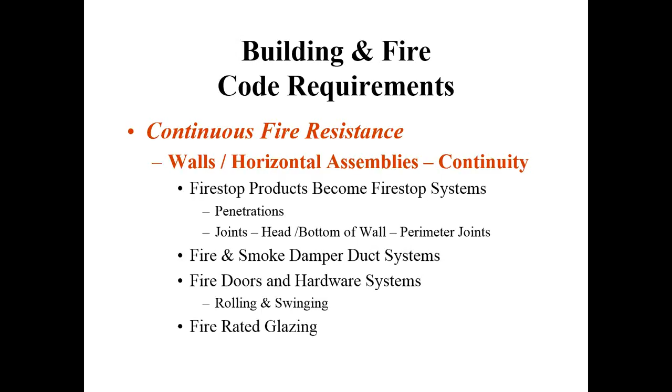Before we have fire stopping and fire resistance rated assemblies that contain dampers, ducts, etc., we have to have a fire resistance rated assembly. That fire resistance rating has to be continuous. That's what sets up the need for fire stopping, fire dampers, fire rated doors and hardware, whether they're rolling or swinging doors, and fire rated glazing.

Continuity is critical. Interestingly, if you look at the far left construction, there's a violation there if you want to be, as we look at it. Certainly the wall seems to have been constructed very much to a UL design.

Below the ceiling tile, the screw heads are all treated with gypsum compound. There's tape and drywall compound over the top of the joints, which are running vertically, occurring at a stud. Hopefully on the other side of the wall, the joints of the wall board are offset.

The violation is that in order to have continuity, that fire resistance rated wall should be going up to the roof deck above, which would be the termination point of the fire resistance rated assembly. Instead, somebody put a steel beam running across the top of the wall, which has no structural steel fireproofing on it. So therefore, the continuity of the wall actually stops at the beam rather than at the head of the wall. Secondly, there's no fire stopping at the top of the wall as well.

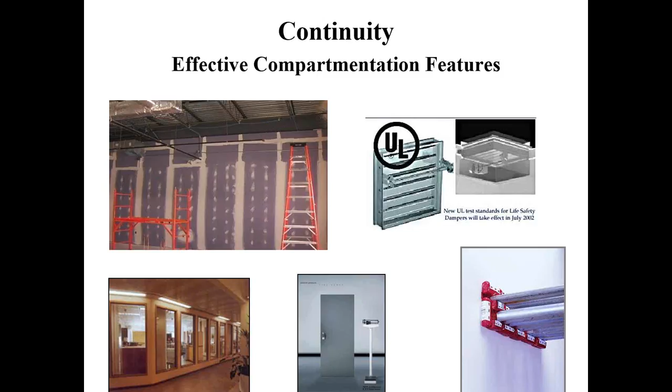But fire dampers, fire stopping, fire rated doors, and fire rated glazing all provide fire resistance. These things become systems. FCIA at the International Code Council development process in the 2006 cycle added for the 2007 supplement in Chapter 7 that the fire resistance is a system. It didn't exist in Chapter 7 at the beginning of the International Building Code before that.

So these products become systems through their testing. I've laid out the test standards that are used, and that testing sets up a suitability for use statement for the specific product in the system application.

If I were to go to the UL directory, I'll find systems that describe what to do with fire-rated glazing. And those systems deal with very complex and limited applications. See if I can get this out of here.

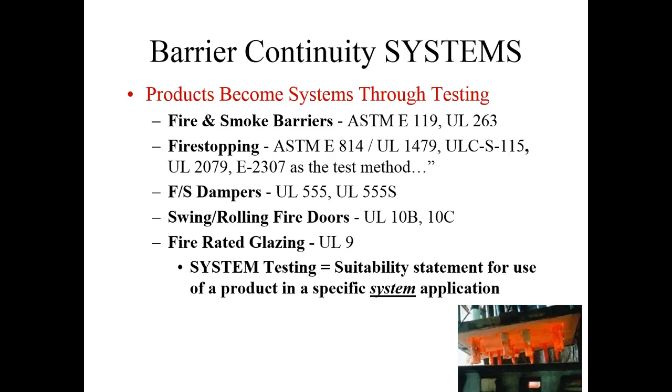In fire-rated glazing, there are impact tests where bags of steel balls would be dropped from a certain height to see if it could punch a hole through the assembly before it has a fire test, in addition to the hose stream test. In fire stopping, you don't have that. It's simply the hose stream test that is used for impact as well.

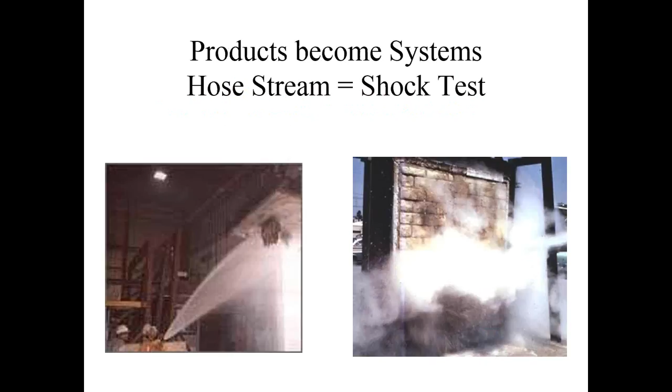So the hose stream test is common. The fire resistance directory is common for all of the different applications. And these systems have to be installed.

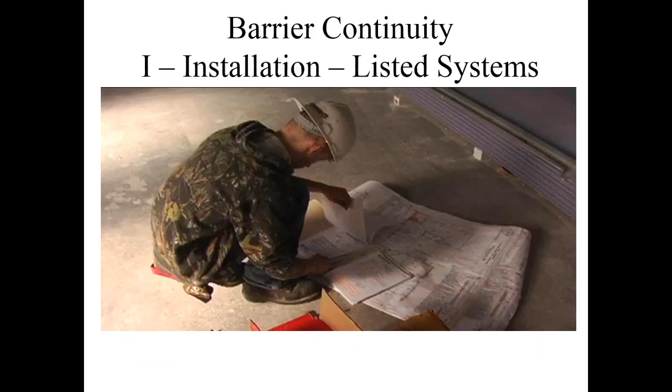When it comes to contractors, the FM 4991 program is a management system-based program. Same thing with the UL Qualified Firestop Contractor program. It has 10 different subsections that have to have policies and procedures written around it. Employee training, system selection, record keeping, communication of systems and documentation to the field and back from the field into

the project file. Documentation, how long does the company keep that documentation? Documentation that's kept are the life safety drawings, specifications, tested and listed systems, and then the manufacturer's installation instructions. All of those pieces are kept in files. For how long? Under the UL and FM programs, 7 years they have to be kept.

So there's got to be a management system around the company's operations that explains all these things. Currently, the Firestop industry is the only industry, other than structural steel fireproofing, that have embraced the management system-based program. Most other programs are individual certifications where an individual takes an exam of some kind after a little bit of training, 10 hours, 16 hours, 12 hours, whatever it is, and then they're declared, quote, certified.

This is just about the company and the individual, the FM and UL programs. And the idea is understanding the systems, their communications, and how they get installed.

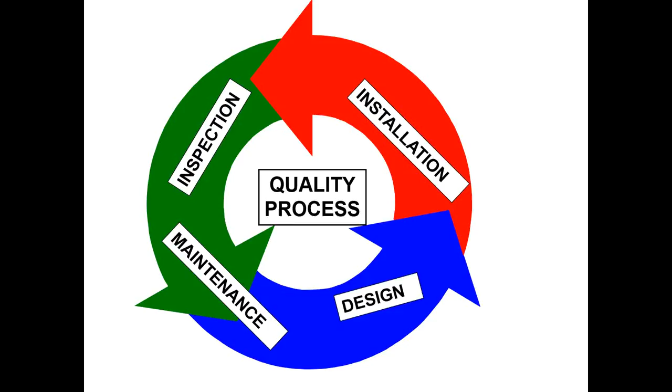Whether it's the design, tested system, the installation, the qualified contractor, and the other two pieces, which we're going to talk about next, the inspection and maintenance, all of these things need to go around in a circle continuously for that building to be safe when fire comes and these fire resistance rated systems are called upon.

Installation and inspection go around in a circle. There's really three types of inspection that can take place. Under the FM and UL qualified contractor programs,

there's contractor self-inspection that the management system actually works. Contractors have their crews double back and take a look either hourly, twice a day, once a week, whatever the company thinks that works for it to maintain its management system quality, whatever that frequency is, that's what the company does.

But all of them have to verify their management system validity through some kind of inspection of their own work by their own people. This is different from a special inspection or a third-party independent inspection.

Manufacturers in the Firestop industry and most of the fire resistance industry don't really inspect. Why? It's different than the roofing industry, where they do have a 10-year labor and material guarantee or warranty that's given to the building owner verifying that the product will be installed to the specifications and work. In those instances, the manufacturers have a pretty big liability.

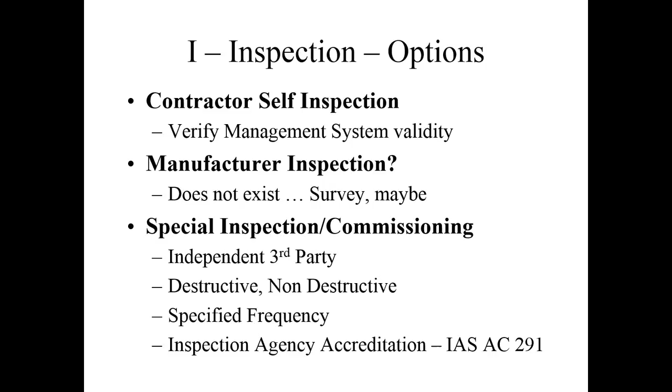There's already a program that exists, International Accreditation Services. I sit on the board of directors of that organization. It has a program named AC291. That AC291 program is a management system-based program like the FM 4991 and the UL Qualified Contractor Program, but it's focused at special inspection. So there are 3 different types of inspection.

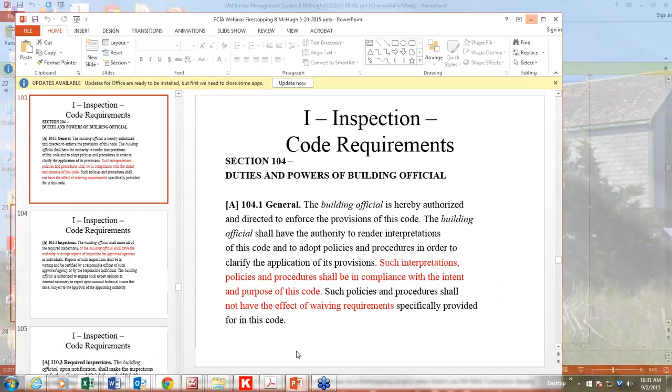All of them exist to try to build safety and fire resistance. But maintenance and management is critical. Let's go back to inspection just for a second. I'm going to spend a little bit more time there because I think it's important that we do this for a couple of reasons. First one is, in the International Building Code for new construction, special inspection is now part of fire stopping.

The FCIA, at its 2000 meeting, had Mike Pfeiffer, Vice President of Codes for the International Code Council, come and speak to us. A question was asked by Roger McKenzie and Don Sabrsula, a couple of contractors, one from Atlanta and one from Houston, and they said, hey man, how come we don't have inspection for fire stops like we have inspection for fireproofing, structural steel fireproofing?

Special inspection for fireproofing has been in the codes for a long, long time, decades I want to say. And Mike Pfeiffer shot back very quickly, well, do you have a standard? The answer was no.

So Mike then said, go make a standard at ASTM, which we did after we formed a standards committee and worked together with our manufacturer partners, some who are members of the International Firestop Council, the Manufacturers Association. We worked together with them to develop a standard for inspection.

We then went to the code. FCIA paid Bill Koffel, our code consultant, and I, of course I work for the FCIA, to go at the code hearings and put it in as a requirement. It took us 3 code cycles, so 10 years to get this done.

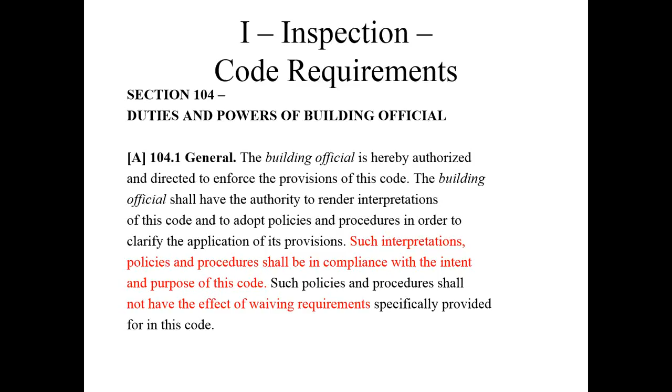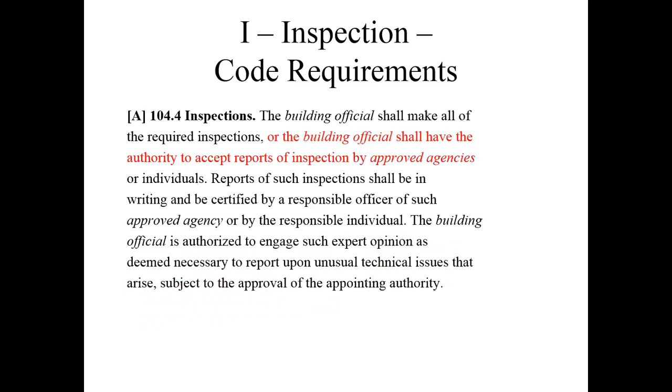The building code official can put together policies and procedures in compliance with the intent of the code and not waive stuff. Inspections can be done by the building official, or they can accept reports of approved agencies. The approved agencies have a definition as well.

Fire stopping is one of those things that has to be inspected before it's concealed. In 110.3.6 of the International Building Code, it says, protection of joints and penetrations shall not be concealed until inspected and approved. What we found as an industry is that the building official fire marshals don't have the staff to inspect all the different times that it might be concealed.

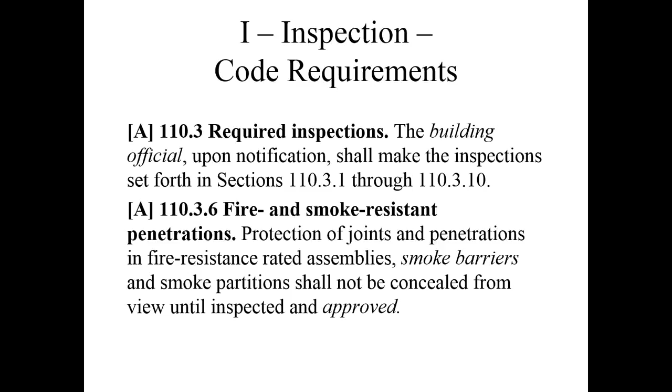If you can think of a high-rise building, there are many different phases. That means that the building inspector from the jurisdiction would have to come to the building site and approve every time they close up a wall. Realistically, the building official doesn't have the responsibility for quality control for the building, and this is a bit much for them to do.

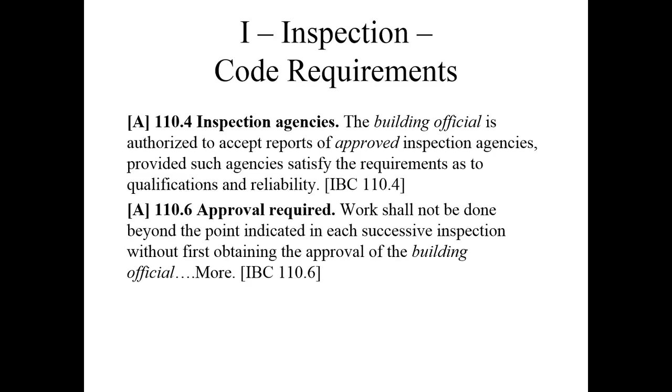The building official can also accept reports of inspection agencies, provided that it satisfies requirements. The agency is a defined term in the code. Approved agency is an established and recognized agency. Agency can be a corporation, like I said, 4 different types: sole proprietor, sub-S, C corporation, LLC corporation, regularly engaged in furnishing tests, inspections, and conducting tests.

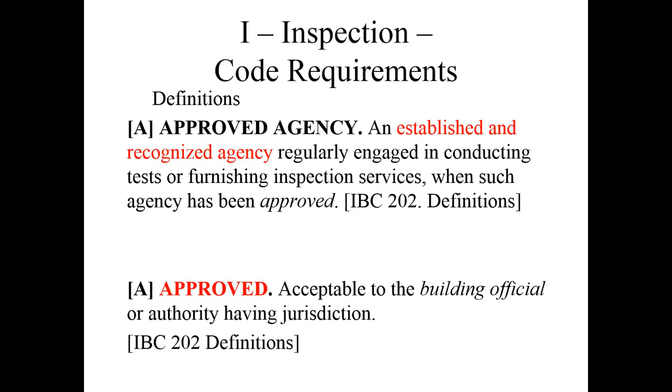The approved is also a defined term. Approved is acceptable to the building official. There's also a definition for the special inspector.

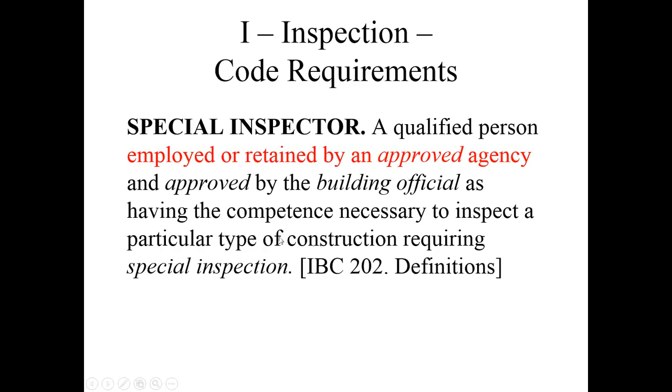That's the individual, qualified person employed or retained by—so it could be an independent contractor working for an agency or an employee—that's also approved by the building official, having competency necessary to inspect a particular type of construction requiring special inspection. This is pretty clear, it says competency, particular type of construction. So if they're inspecting fire stopping, they're going to be competent in fire stop.

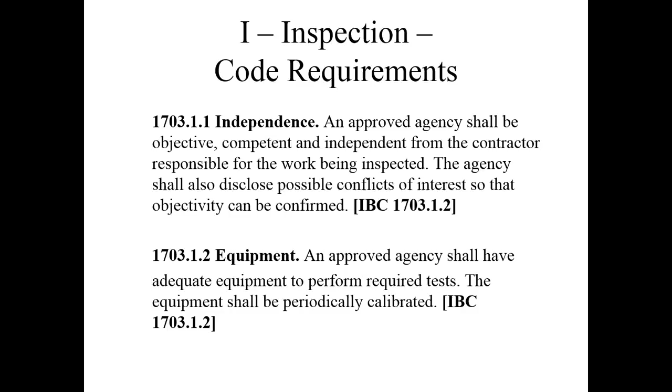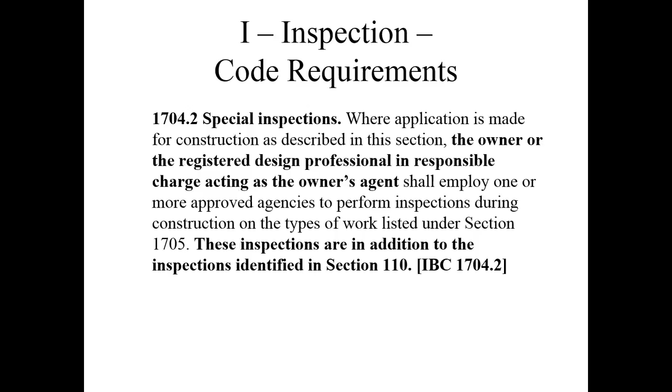In Special Inspections, Chapter 17, it also goes on to say that the approved agency has to provide information. The approved agency has to be independent, objective, competent, independent from the contractor installing the work. And the personnel shall be experienced in conducting, supervising, evaluating tests. Alternatively, the owner can have the registered design professional as their special inspector as well.

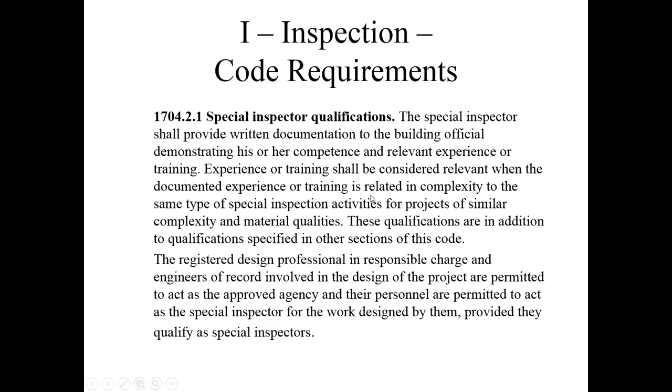And then it goes on to talk about special inspector qualifications, and it's two paragraphs that the special inspector has to provide. Experience or training—here it goes and says complexity, same type of special inspection. So a welding certification doesn't help you in accepting whether or not the inspector can inspect fire stops.

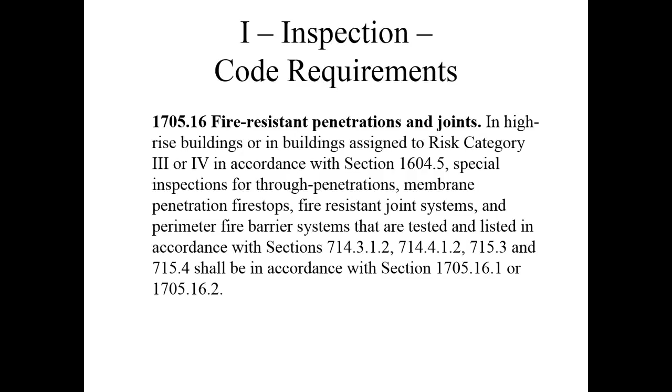And then here's what the standards say about penetrations and joints. High-rise buildings, that's a defined term in the building code. That means 75 feet and higher above the lowest fire department access, and the 75 feet is to the highest occupied floor—not 75 feet to the roof. Contrast that to the NFPA, which says 75-foot high building. The National Building Code of Canada, I believe, does the same as that as well.

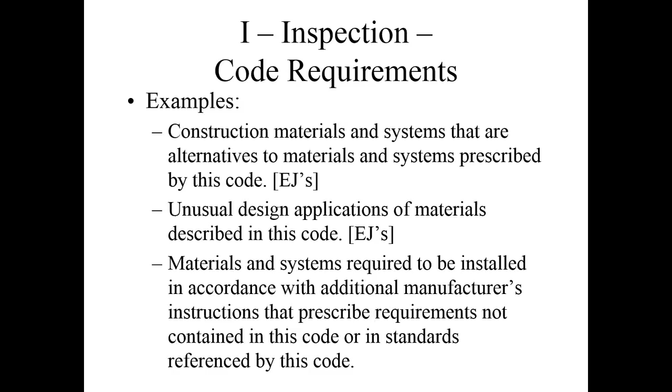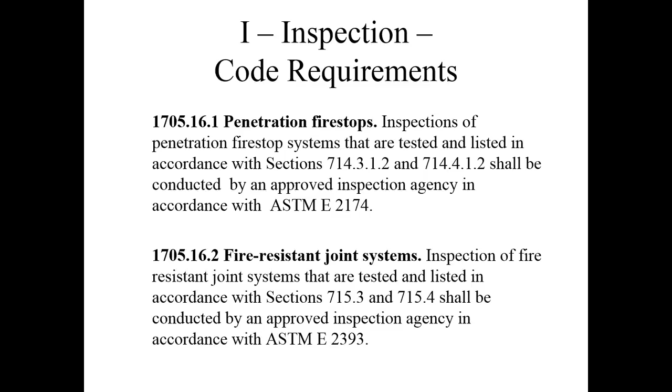So special inspection can also be prescribed for unusual design applications, engineering judgments, that kind of thing. High-rise building we talked about. And then penetration fire stops are inspected to ASTM E2174 and 2393. Those standards have also got independence in them as well.

Critical thing to remember, though, is that the ASTM inspection standards say that the notification of variances to the contractor is one day after they're discovered. The International Building Code says that the contractor must be notified immediately after the discovery takes place. That's a huge difference between the two. Now, it doesn't mean it can't take place, because with cell phones and text messages, if it's set up right, the contractor can be notified immediately—especially in the situation of 2% destructive testing or 10% variance.

Let's take a look a little bit more about the standards. The inspection standard, ASTM E2174, says that you need two years experience and to be accredited to the AHJ. If you remember, the code says that the inspector needs to have experience in the same type of inspection and the type and complexity of the materials being inspected. So the code says the inspector should be experienced in fire stopping. The standard, ASTM 2174-2393, currently doesn't say you have to have any experience in fire stopping—it just says experience in construction or field inspection and accredited by the AHJ.

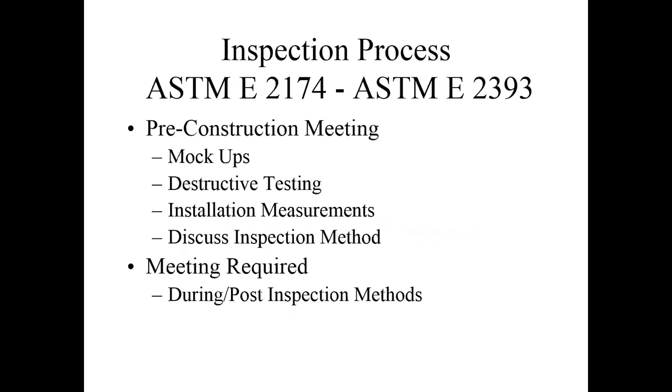So there's a pre-construction meeting in the 2174. There's mock-ups that are put together, destructive testing is done, and the inspection method is discussed. The inspection method for inspection of fire stopping is 10% of each type of fire stop, no less than one, or 5% of the total lineal feet of fire resistance rated joint system. This is the over-the-shoulder inspection.

So there's two methods allowed under ASTM E2174-2393: either over-the-shoulder inspection as the contractor is installing, or destructive testing. The destructive testing is minimum 2%, no less than 1 of each type of firestop per 10,000 square feet of floor area, and minimum 1 for every 500 lineal feet of joint area as well.

This standard, E2174-2393, is referenced in the appendix of the National Building Code of Canada, and also in the appendix of NFPA 1 and NFPA 101. The FCIA and the International Firestop Council worked together to put that into the NFPA code. The International Firestop Council and the Manufacturers Association supported the FCIA during the International Building Code development process to have this put into the code.

Again, when there's variances, it's one-day notice to the contractor under the standard, and under the code, immediate attention. In the code world, once you look at the building code, the building code language always wins over the standard referenced in it if it's more restrictive.

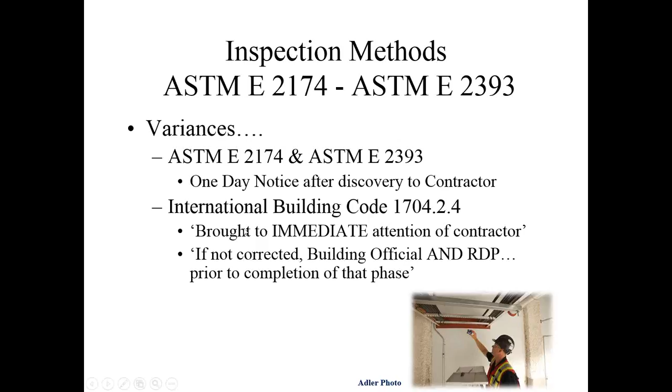Therefore, on projects where the International Building Code and E2174-2393 are mandated, this language is required. If there's variances, the inspection stops. The inspector notifies the contractor through the proper channels, the contractor corrects their work, and then back they go.

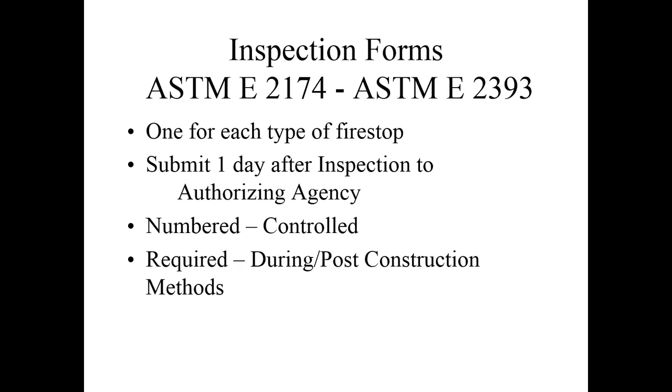There's an inspection report that has forms. There's minimum requirements in the inspection standards about those forms, and they're submitted pretty quickly as well. The code then talks about the inspection report, and here's what it says: the immediate attention of the contractor for correction. That's huge. It's sitting right in the building code.

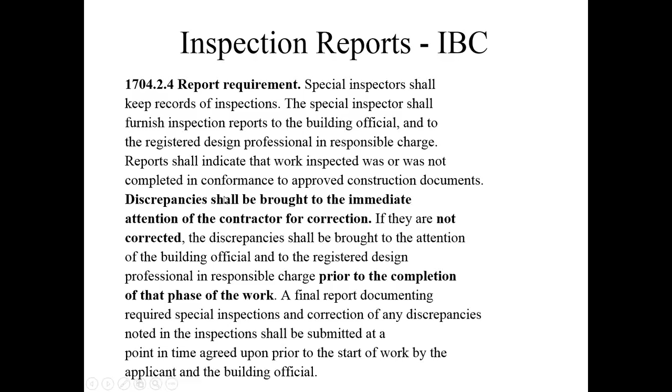So it's important to have those things. Got a question that just came up on inspection. It says: some of the projects we are working on, the third-party inspector is requiring that the firestop systems on the project be included on the drawings. Is this part of the inspection code or the inspector's prerogative?

Great question. The International Building Code doesn't necessarily say what systems need to be referenced on the drawings. What it says is that the fire-rated barriers have to be located and marked on the drawings.

Typically what happens with the architects is they'll put a representative sample of what systems might be on the project itself, but not necessarily tying it to every single system, because we know that the electrician has not decided what size and type of conduit to use or cabling to use. And in many cases, the mechanical plumbing contractor may not have chosen the type of penetrating items that are going to be used on that project. So therefore, it can't be 100% of the tested listed systems on the drawings.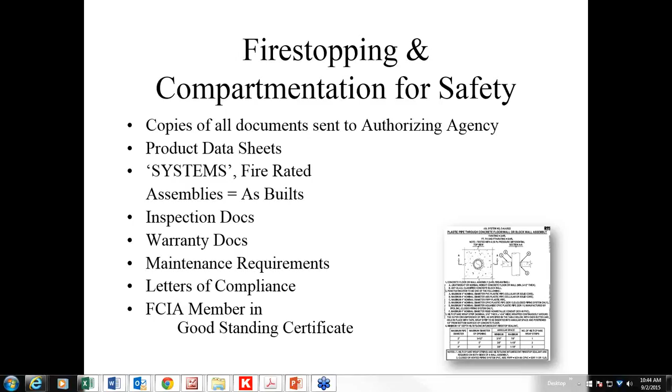Moving back to the slides, the FCIA believes in inspection. We believe in quality contractors. We believe that you need both the installation and inspection properly done to have the right value delivered to the customer, the building owner and manager that uses the building after it's all said and done.

We believe the individuals should be educated and trained. We really respect the manufacturers for all the work that they have done over many years to educate building code officials, contractor personnel, and inspector personnel. The FCIA has done the same thing as well, and we've worked together as an industry, sometimes separately, but all after the same result: the right stuff installed the right way, inspected appropriately, maintained for the life cycle, so at the end of the day, when a fire hits it, it works.

Both associations, both organizations are after the same thing. Under the specification side of things, we talked a little bit about it. Now I'm going to cover this just quickly for a couple of minutes, because while most of our industry focuses on the building code and the fire code, specifications are huge too, because it sets up the scope of work.

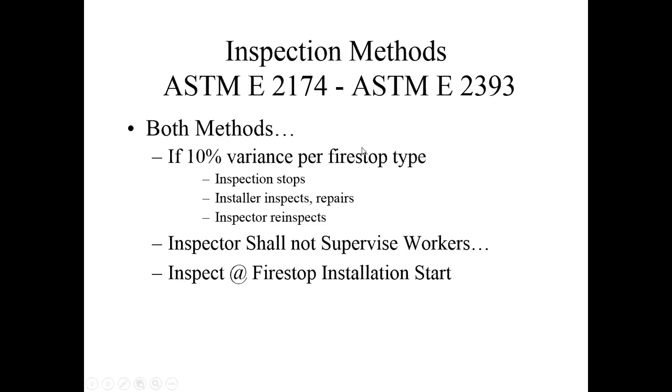Before I get there, I've had a question come in about destructive testing. Let me back up a second, back to the type of inspections. So there's two types of inspections under the ASTM E2174-2393.

The first one is, as the contractor is installing the firestops, the special inspector uses a measuring device equal to the measuring device of the contractor, so both of them are using tape measures. Under the quality management system approach from UL and FM, these measuring devices have to be checked to make sure that they're legible, that the markings are appropriate, and that they're not bent to the point that the measurement is inaccurate. If you look at this tape measure, there's a little bit of a bend in it.

Is that going to affect things? I'm not too sure, we'd have to ask UL that. At one point, UL was going to put into their qualified contractor program that the measuring tape had to be calibrated. A calibrated measuring tape is $150.

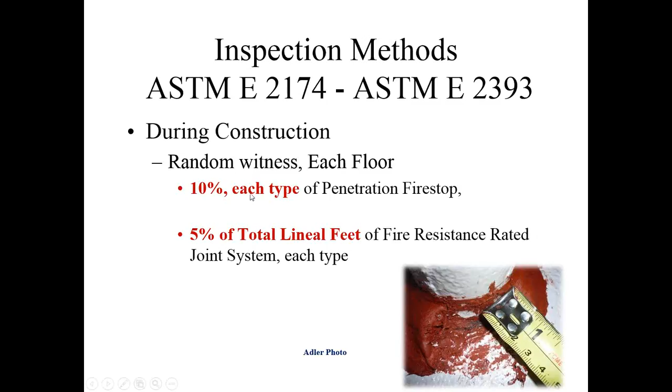We then asked UL, how do you measure your annular spaces in the testing laboratory? They said, we use measuring tapes. We asked, are they calibrated? They said no. So in order to pass through exactly as the lab tests it, we're not using calibrated measuring tapes. Random witness is one thing, and destructive testing is also done.

The destructive test would be, we take the tested and listed system from the UL directory for this particular opening. It looks like a cable tray going through a fire resistance rated wall with an annular space of X and a number of cables of X, and check all the parameters. Is the annular space matching up? Do the penetrating items match up? Does the Firestop system product that was installed match the system shown in the directory?

If it's supposed to have a half inch of latex-based intumescent Firestop sealant, if we're inspecting right away as it's being installed, is it a half inch deep? If the product has been there for a month and a half and experienced some shrinkage, as all latex products and Firestop products that cure, that aren't two-part catalyst cured, have they shrunk and how much? Does that shrinkage match up to the shrinkage reported by the manufacturer of the Firestop product, to determine whether or not we got the appropriate thickness?

So destructive testing is cut open the seal, check the components of the Firestop, and see that they match up to the tested and listed system. Is the direction of the penetrating item matching? Does the wall or floor match up? All of the different things.

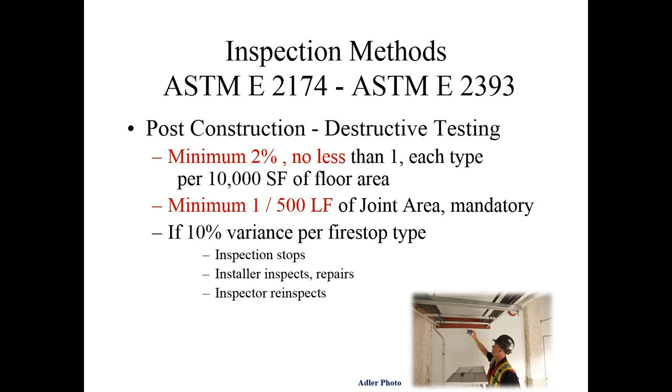What about specifications? In part one, you're going to want the products listed, or the references: ASTM E2174-2393, ASTM E814, UL 1479. That's all in part one.

In part two, you're going to describe some of the testing that needs to take place that qualifies those products for use. Under part three, quality assurance, that's where you're going to have the independent inspection.

It needs to reference back to Division 1 so that it's hired by the building owner and manager and not by the general contractor. Why? Because if the general contractor is hiring, they're responsible for the schedule, and it puts a conflict between the inspection and the schedule. The schedule has to roll. The inspection may slow it down.

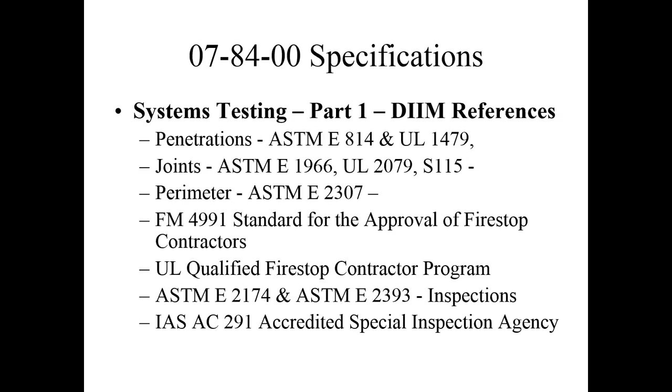And then the references, you can take a look at these at your leisure along the way as well. One question that constantly comes up is, our facility has standardized on, pick a manufacturer, STI, Hilti, 3M, Rector Seal, any of them. They're great manufacturers, we support them all, and they're good friends. But can we have a single product in that application?

It gets difficult when the engineering judgments start showing up and whether they're accepted or not. The rule of thumb for engineering judgments is that if there's a manufacturer that has a tested and listed system and it's not the manufacturer of choice at that facility, we're supposed to use the manufacturer that has the tested system. That means we're switching manufacturer.

Therefore, as a specifier, you can use a single source product to the greatest extent possible. That greatest extent possible opens up the possibility that we can switch a manufacturer. In other words, we're using as much as we can to the single source, but if we have to use another manufacturer because they have a system and one of the other guys doesn't, then that sets up the ability to do that. Where does that come from?

The International Firestop Council, which is the Manufacturers Association, has a protocol for engineering judgments. And that protocol is pretty specific. It talks about the manufacturer producing an engineering judgment and others accepting it.

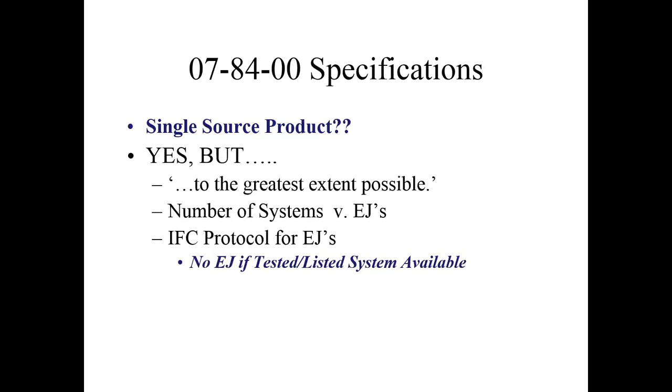Under the systems, FT, H, L, and W ratings are all important. L ratings are particularly important in smoke barriers, which we find in hospital organizations, where we find barrier management programs. Our industry, the Firestop industry, has declared that smoke resistance is gained through L-rated Firestop systems.

So the question that frequently comes up: okay, we've got a smoke partition, which is not a fire-rated assembly, but it wants smoke resistance. What do I do?

Well, think about it. The wall is made out of 5/8-inch gypsum wallboard. That 5/8-inch wallboard, regardless of whose it is, is type X, whether it's fire-rated or not. It's installed on metal studs or wood studs, spaced appropriately to hold the wall up. That spacing likely is the same as you'd have with that fire-rated assembly. It has screws that hold the wallboard to the studs, and it's continuous to the next assembly. The only thing that changes is it's not been declared a rated assembly, but it looks just like, tastes just like a fire resistance rated wallboard assembly.

So therefore, we believe that installing a Firestop product that is L-rated into that assembly gives the closest approximation for smoke resistance that we have. It gives a quantified smoke resistance, which is required for smoke barriers, not necessarily required for smoke partitions, but it is the suitability for use statement of Firestop products as smoke resistant assemblies.

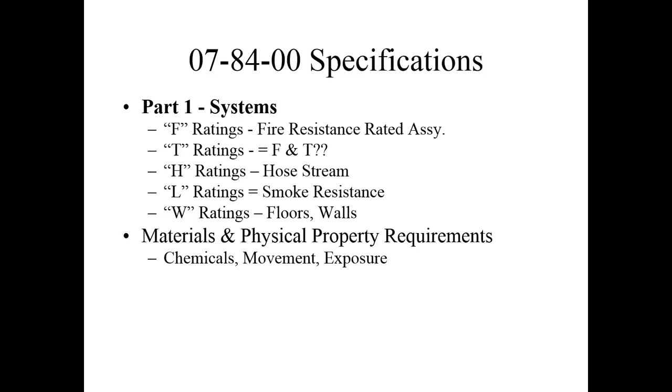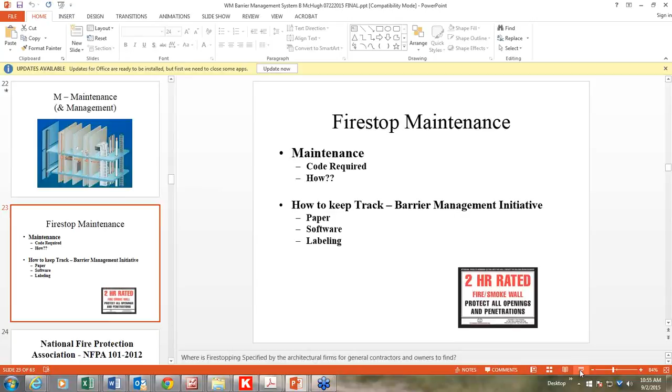As far as maintenance and management goes, let's go back to the other presentation and talk about barrier management. Maintenance is critical, and I'm not sure maintenance is the right word. I think management, barrier management, is a better word.

Why? When we talked with the Joint Commission and the American Society for Healthcare Engineers about this barrier management symposium, at first the discussion was about these holes in the walls and these darn doors. The fire doors don't close and latch. They're propped open, and they're not paid attention to. And what about those holes in the walls? Well, yeah, it's about that.

But what about the angles on the fire dampers? Were they put in right? What about testing them as required by the fire codes and NFPA 80, which is testing upon commissioning, testing 1 year after it's been commissioned, and then every 4 years in office buildings and every 6 years in healthcare facilities? What about that? Is that done?

What about the fire-rated glazing? Has the wall been compromised between the frame and the wall that would cause it to fail the hose stream test? And what about the rolling doors and the fire stops and the wall itself? How has the wall been repaired to make sure that the fire resistance is held? Can we just put a bunch of drywall mud over that hole and still have a fire resistance rated assembly? Can we just put a bunch of grout or mortar around it and still have a fire rated assembly?

So very quickly during the discussions, we decided - the Joint Commission decided, American Society for Healthcare Engineers, FCIA, and UL - we should be talking about the whole barrier so that it's bought as a system. Because it is a system, each component needs to work right for it to protect people at the end of the day. If we as the fire stop industry do a good job, but the fire damper doesn't work, we've still got a big hole in the wall.

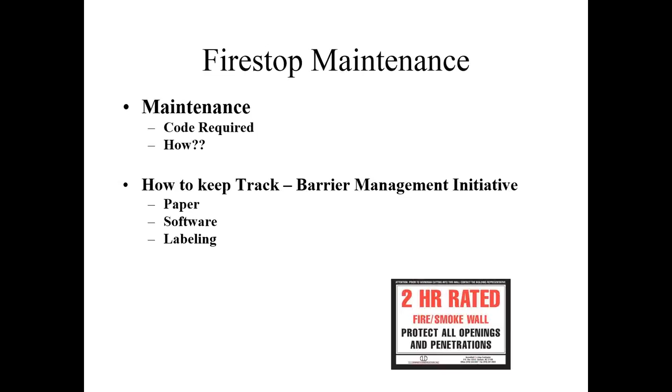So we talk about maintenance and management. That's what this barrier management initiative is. How do we track it through the life cycle of the building to make sure that the building has fire resistance rated assemblies throughout its life cycle?

First thing is that the building and fire codes require it. NFPA 101, the Joint Commission enforces NFPA 101-2000. But if you look at the language in the 2000 version of the code, as well as the 2012 language of the code, they're basically the same. NFPA 101 is what healthcare facilities operate under, and a lot of other accredited facilities, day surgery centers, on and on.

It says wherever and whenever a device, system, or fire-resistant construction is required for compliance, it has to be continuously maintained in accordance with NFPA requirements. That's the ASTM E814 tested system for fire stops, UL 555 for the damper, on and on.

So continuous maintenance. Now, in a court of law, the question would come up: well, what's continuous maintenance? Certainly no building owner is going to check above ceiling tiles to make sure there's continuity of fire resistance every day. That's unreasonable. But what's a reasonable time frame? We'll talk about that in a little bit, because I think other codes have already laid that out.

Also under NFPA 101, it talks about no life safety feature shall be removed or replaced if it's obvious to the public and not required by code. It still has to be maintained, so the building owner or manager has to remove stuff once it's been declared not required by code. So if the compartment got bigger and that fire rated barrier is now declared not rated, if the building owner or manager wants to not maintain it, they have to remove the fire resistance rated stuff.

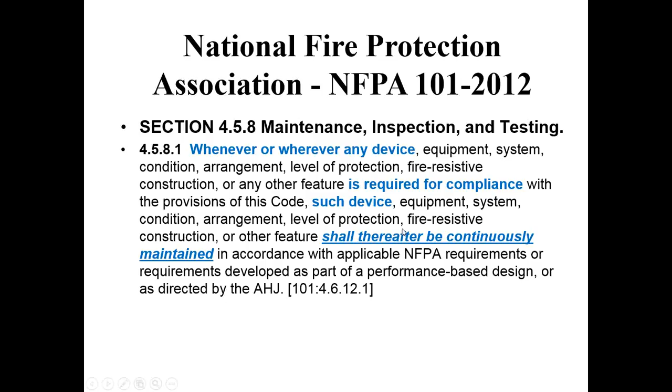So, how do you maintain the fire ratings? Visually, by the owner, and then continuously with some kind of procedure.

I've had a question come up about a product called smoke and sound for smoke walls. That's pretty much an acoustical sealant. Well, thanks for the question, but I don't know what that smoke and sound stuff is. The question would be, has it been tested, and does it have an L rating? The L rating is the suitability for use statement for Firestop products and specific applications. If it has no L rating, then it's not a smoke system.

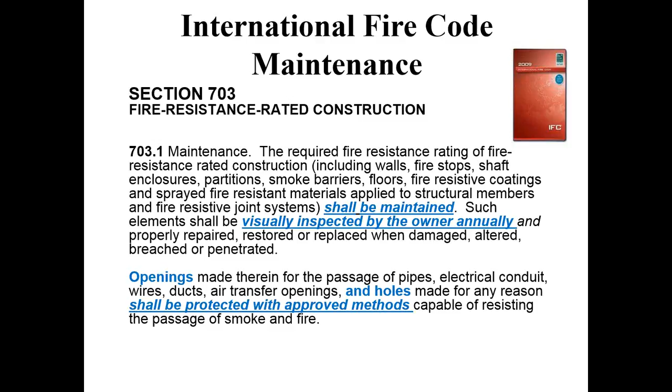So those are the questions to ask. Thank you for asking that.

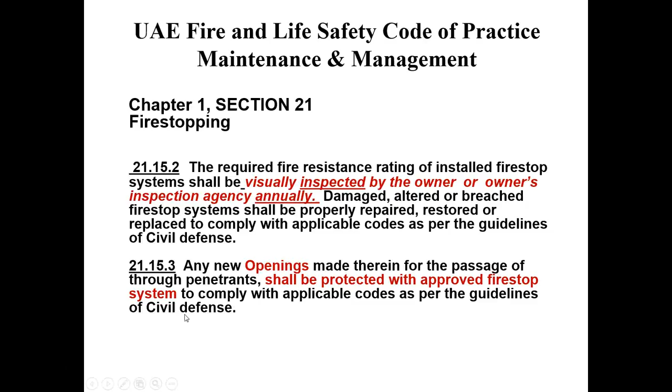Going to the Middle East, the UAE Fire and Life Safety Code of Practice, which several members on the phone worked on, has similar language to the International Fire Code: visual inspection annually, and then protect with approved Firestop systems to comply with applicable codes per the guidelines of the civil defense. In the UAE, the civil defense is the same as the building official, fire official type person.

In the National Fire Code of Canada, it talks about damage to fire separations, where they're damaged so as to affect the integrity. They shall be repaired so that the integrity of the fire separation is maintained. So again, it gets back to continuous and maintained.

How frequently does that maintenance have to take place by the building owner or manager, and then what do they do? The FCIA Manual of Practice has a complete appendix on maintenance and also recommends barrier management.

So now you're the building owner and manager, and you got to say, okay, this is a real pain. I got the plumber, the mechanical, the electrical, the drywall person. I got people punching holes through these fire-rated barriers like there's no tomorrow. How do I deal with all these problems coming at me at once?

Well, the old management adage is, don't fight the alligators. Drain the swamp of the water and it'll kill the alligators. The barrier management program, regardless of which one you use, is there for that reason: to fight the root cause of the problem, which is how do we manage the barrier, and then work backwards to kill the alligators.

The barrier management begins when new construction ends. In new buildings, the specifications are very clear. The specifiers we've spoken to since 2000 and before have had great discussions about specifications and what to do and how to line them up. Master Format has evolved over the last several years such that the 078400 section for fire stopping already exists, and it does a great job.

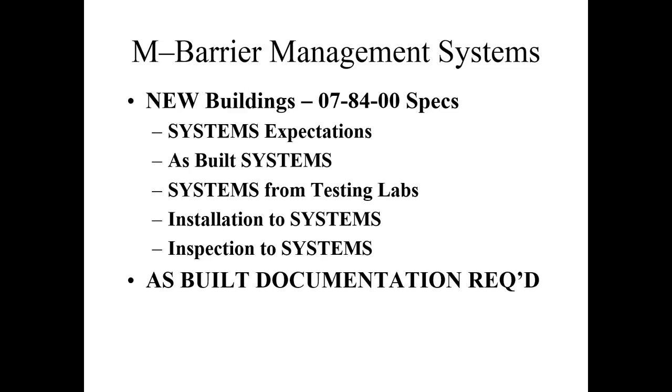The common element, though, regardless of whether there's dampers, doors, etc., is that these are all systems with systems expectations, tested test standards for those systems, and documentation built around those systems.

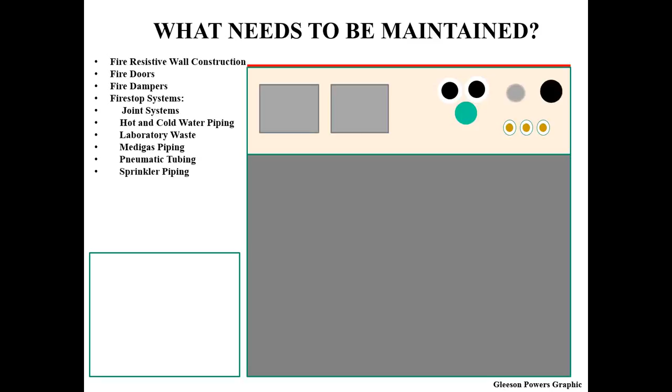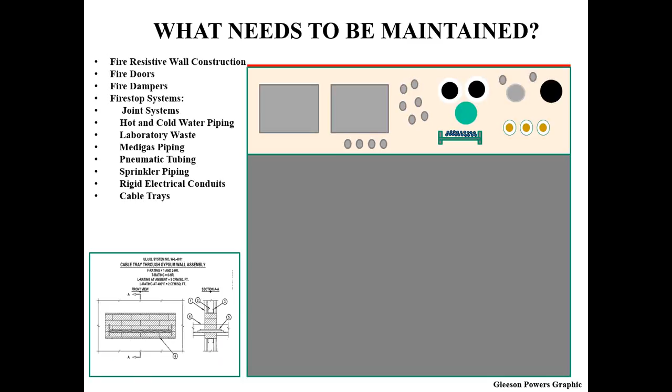So now it's the building owner's program to deal with, and there's lots of things that need to be maintained: the wall, the doors, the dampers, the joint systems at the head of wall, hot and cold water piping, laboratory waste piping which could be plastic, polypropylene, or glass, pneumatic tubing, sprinkler piping, rigid or non-rigid electrical conduits. These are all going to have tested listed systems, as you can see below, that outline the type of penetrating item, the annular space size, the opening size, etc. It'll also outline the type of products used.

So all of these holes above the wall can turn into a mess. How do you manage them? The company or organization that owns or manages the building has to have some kind of a program for it. These constant issues, these holes in walls, have to be controlled through more means than just a Firestop contractor or a general contractor.

It starts with the facility person, healthcare engineer, building engineer, doesn't matter. That person who manages the asset of the building has to manage the whole program, has to convince the corporate suite that owns the buildings that these barriers need to be maintained, and it's going to be a line item budget every year.

Got to control the in-house and the outside contractors and make sure that they know what they have to do. The IT department, they have to be controlled to know what to do when they hit a barrier.

So the hub for fire resistance and barrier management is the facility engineer. They answer to the Joint Commission, the Centers for Medicare and Medicaid Services, building official, fire marshal, the corporate suite, and most importantly, the staff that has to be protected by barriers and the patients that are in those buildings.

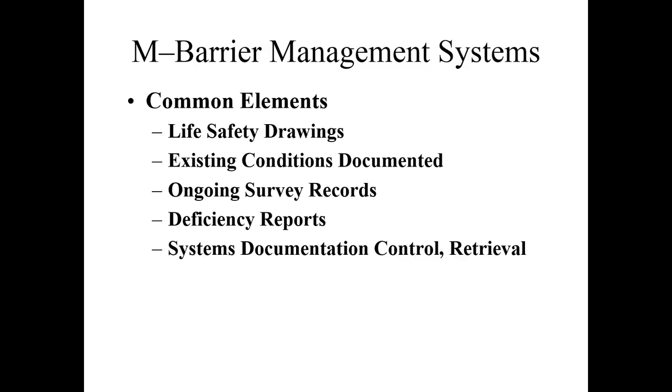The only way to really know if the wall or floor is compliant is a destructive test: cut it, saw through it, check the section of it to see if it complies with the life safety drawings and the systems requirements from the UL directory, and then document that so it's easily retrievable.

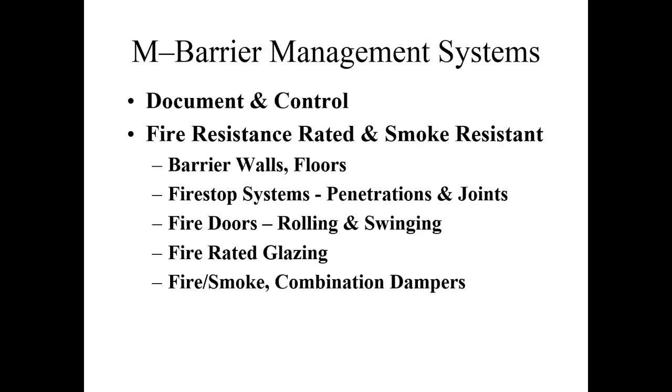There are systems for all these things: the barriers, the walls, the glazing, the doors, the dampers, and the fire stops. Then some kind of repair procedure is needed. If you ask anyone in the trades how they fix a fire resistance rated assembly, you get a million different answers. The right answer is what Nestor Sanchez delivers during his barrier management program, gypsum portion, at the Barrier Management Symposium.

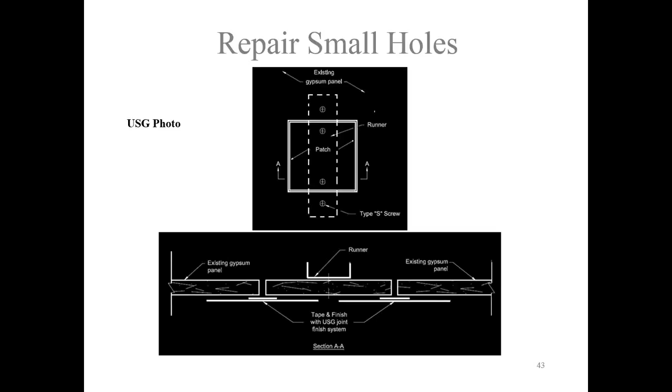If you take a look at these two designs, it talks about patching that would be conducted and made so it conforms to the Gypsum Association's recommendations. So if there's a hole between two studs, the Gypsum Association recommends cutting the wallboard over to the stud and framing the opening. Horizontal studs in between the two vertical studs would be installed, and then the wallboard installed, because the wallboard needs support behind it so the patch doesn't get blown out during the hose stream portion of the fire test.

So follow the Gypsum Association recommendations and patch it. Install a stud side to side amongst the vertical studs, metal or wood, it doesn't matter, and then patch the drywall the way it's supposed to be patched.

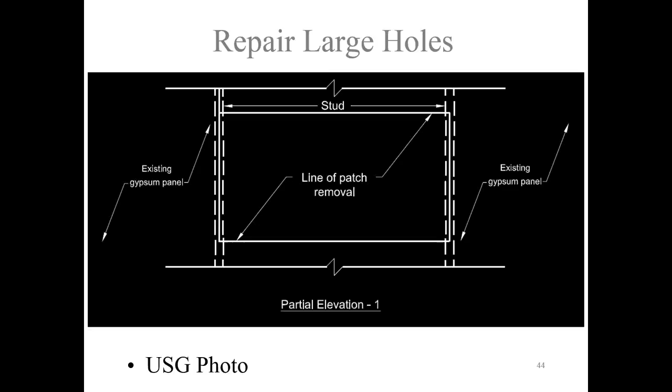Best practice elements to include in a barrier management system: first, it has to have specifications, has to have surveys to assess the barrier and make sure it's in compliance, has to have action reminders, status of repairs in process, and then a way to get the records once they're stored somehow.

One thing that comes up frequently is barrier permits. Let's say a facility - could be a healthcare facility, an office building, or a dormitory - and somebody wants to install a penetrating item through the floor at 3T1 and run it through the fire barrier and above the fire doors to get to room 310, to put in a new something: fiber optic interduct, plastic pipe for plumbing or mechanical, sprinkler pipe, whatever it is.

So first things first, they've penetrated a fire resistance rated horizontal assembly, so there needs to be something done here, and then penetrated a fire or smoke barrier. If it's a smoke barrier, then we're talking about an L-rated Firestop system to meet the requirement of the L rating for the wall. The L rating for all fire stops is cumulatively 50 cubic feet per minute per 100 square feet of wall opening area. So we'd have to count up the penetrating items and see if this one puts us over the top.

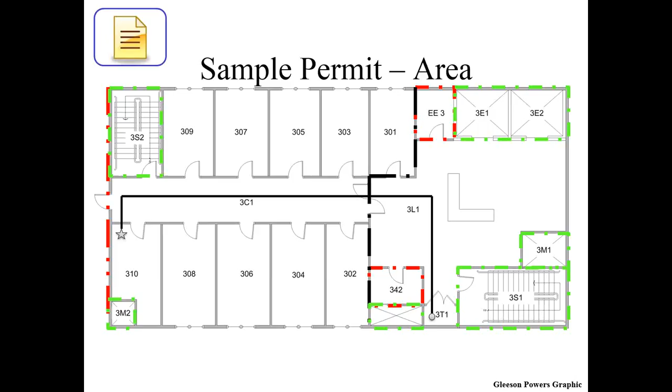And then finally, and most importantly, infection control authorization. There may be carts required to be with negative air to stop any germs that might be up above that ceiling tile from moving from place to place. Big important piece of it.

So how do we track all this stuff? Software programs exist that would identify what's going to take place. It can track what Firestop permit number was given - this could say fire damper permit, fire door permit to work in that area.

Dates of issue and then completion, and when they're going to be active, so that when they're up on the floor with their permit, the nurses and other staff can know whether that person is authorized to be above the ceiling or not. No sticker on their card or ladder, they get reported downstairs to the facility people. And if they're reported, that facility engineer can come up to the floor and offer a pizza party to everyone for turning in that person that was not authorized to be above the ceiling. Really a very important piece.

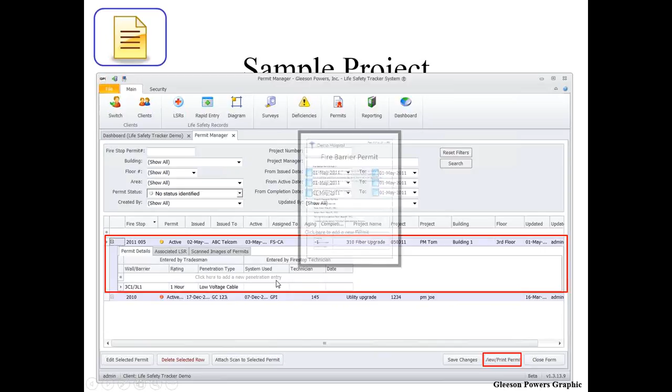Then the scope of work is determined. Is it a wall or barrier? What fire rating is needed? Is there a penetrating item going through? And then what technician did what work, what system did they use to take care of it? That system or that barrier permit might be something like you see here with the authorization on it. Then, what system was used?

The systems would be identified here under the UL number. Is it compliant or not compliant? There could be a picture to it, and again, this could be a fire damper, fire door, any of it. I'm not going to spend time on this because these workflows can be made as complicated as you want.

The critical thing is, from the fire resistance perspective, FCIA had a code proposal in to put labels on walls for fire stops, to identify what the penetrating item was. This code proposal completes something very important in the circle of fire resistance.

Fire damper manufacturers mark their dampers, tested to UL 555. Fire door manufacturers have labels on the doors and labels on the frames, for the openings. And the fire glazing manufacturer has marking on the fire-rated glazing. So everything's already marked. The only thing not marked, from a penetration perspective, is the penetrating items and joints.

It's not required to mark what system was used. Without knowing what system was used, call it UL CAJ 1055, we don't know the manufacturer of the firestop product, nor do we know the thickness of the firestop sealant, the type of mineral wool that might be behind it, or the annular space allowed. We don't know any of that without knowing the system number.

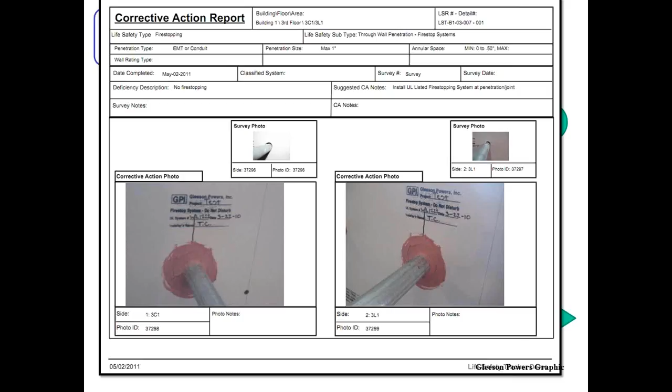It shows me a metal pipe. The annular space can be an inch, and then I can check it. Nobody has to go back and research what system was used after the fact by paging through and figuring out the manufacturer and the annular space.

Huge, huge items. So important to have the documentation, important to have labels, important to have permits required with healthcare facility rules and infection control rules followed.

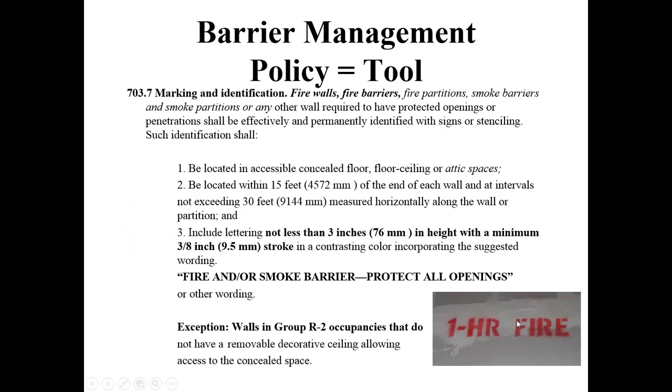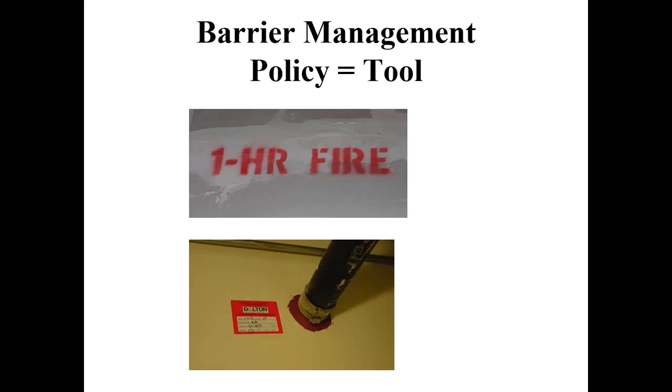The markings currently required by the International Building Code only include marking the barrier itself. Under the fire code, we're trying to get the barrier marked as to what it is: a smoke barrier, a fire partition, a smoke partition, or a firewall. Each of these are different things. A firewall would have an independence clause saying that each side of the assembly can collapse and one side of the assembly will be completely there as well.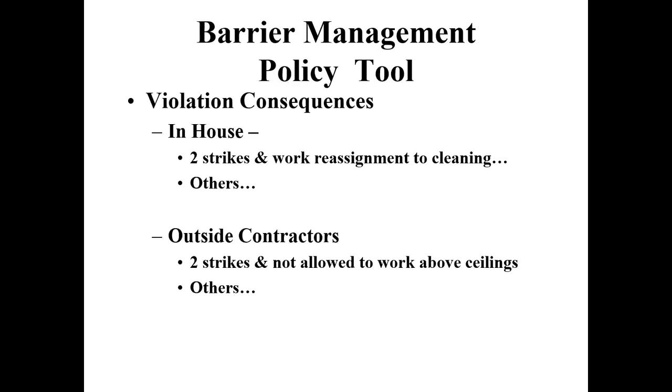Fire doors have to work. The fire-rated walls have to have the holes fixed, whether accidental or caused by workers. In order to have fire resistance rated construction work, it's got to be continuous. The barrier, the wall, regardless of type, the fire stops, the dampers, the doors, the glazing, all need to be systems. This fire effective compartmentation is in there for a reason: to work and protect people.

Next question from the audience: is an L rating required at a smoke barrier if the code does not require it? I'm assuming the code does not require it.

The International Building Code, let me see if I can bring it up. Give me a second here. The International Building Code requires an L-rated fire stop for a smoke barrier. A smoke barrier is a 1-hour rated assembly. I'm not going to bring it up.

So a smoke barrier is a 1-hour fire resistance rated assembly, continuously sealed, and it requires that the L rating be no more than 50 cubic feet per minute per 100 square feet of wall area. So yes, an L-rated fire stop is required in a smoke barrier.

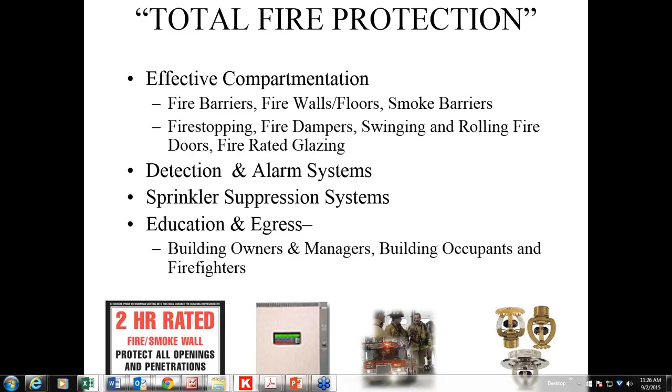So if you look at a wall with 5/8 inch drywall on it, it's usually fastened about the same whether it's fire resistance rated or not. The way to approximate that smoke resistance is using an L-rated fire stop system that uses a fire stop product that's been used in that application. Great question, thank you. At this point I'd like to open up for questions.

We've talked about the DIIM and looked across a lot of different industries. We know the continuity is needed. I'm going to post this presentation to fcia.org, on the right-hand side. Look for it tomorrow morning because I'll probably not get to it till late tonight. The Firestop Contractors International Association participates with the American Society for Health Care Engineering and others. Our next symposium is